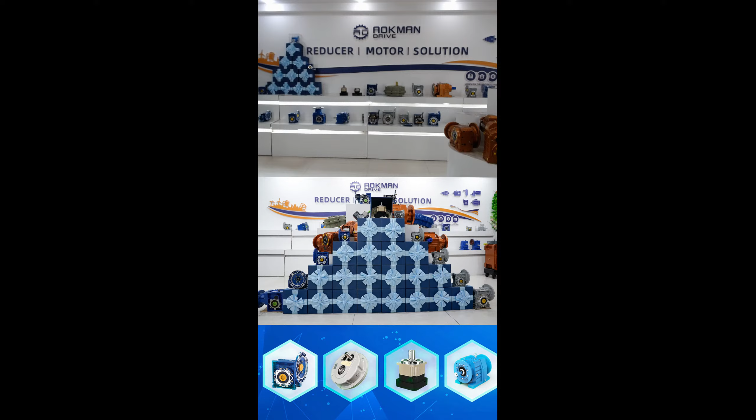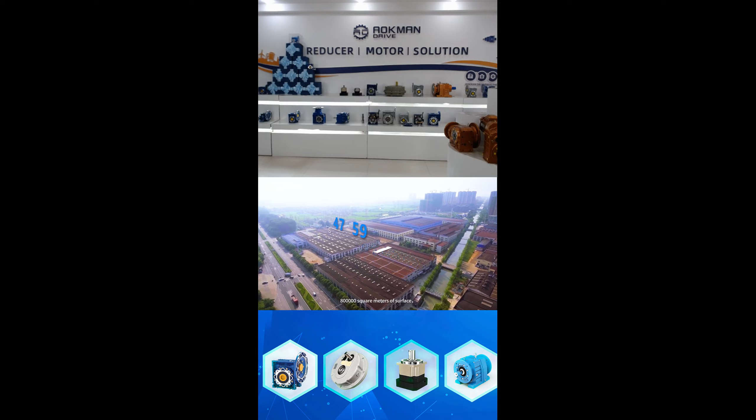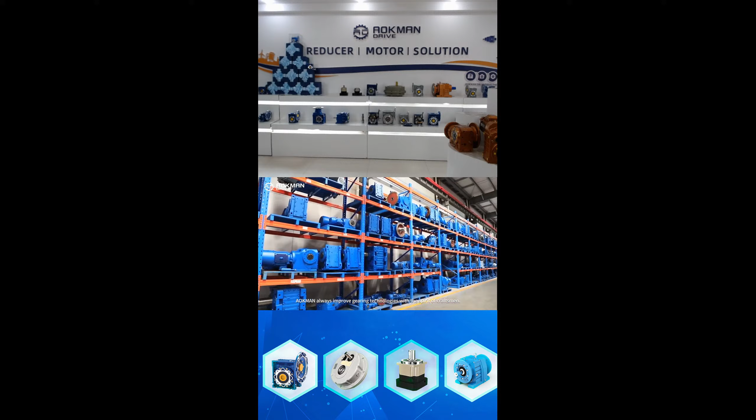Aokman, a leader in the manufacturing of special industrial gear units and standard gear motors. The factory was founded in 1982, with 800,000 square meters of surface, and production made of more than 2,000 experienced workers, with over 30 years of experience in gearbox manufacturing. Aokman always improved gearing technologies with the spirit of craftsmen.

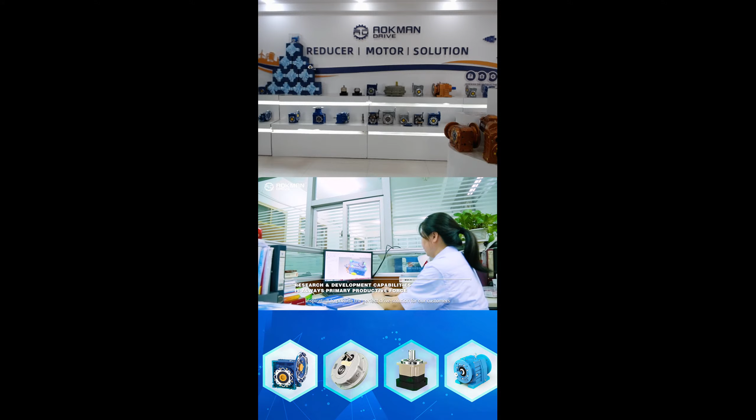R&D concept: inspiration to provide the perfect drive solution for our customers is the foundation behind research and development. Aokman has a professional gear and reducer technology research and development team and has reached the international advanced level in the technology of gear, reducer, and power transmission elements.

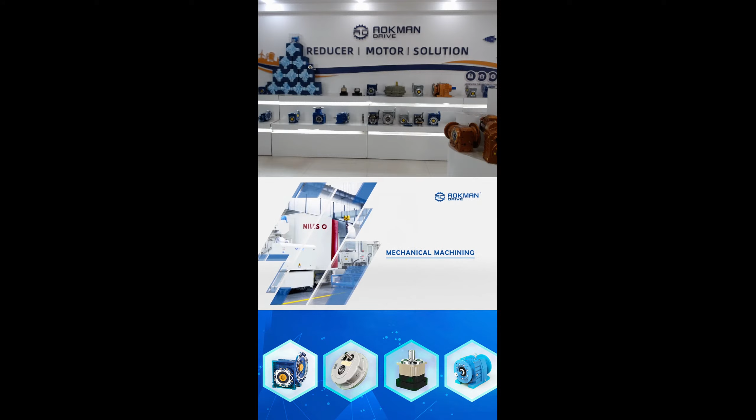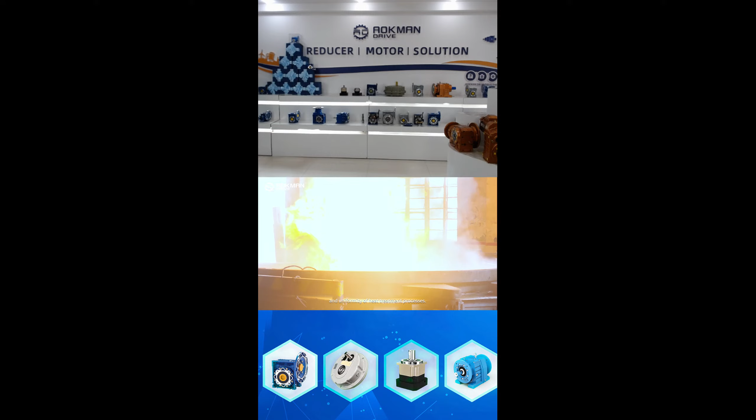Mechanical machining: cutting-edge production technology is the essential building block to achieve high-performance geared products that Aokman's customers are asking for. The high-tech equipment and specialized labor guarantee reliability, quality, and uniformity of heat treatment processes. The industrial complex has been steadily upgraded with leading-edge machinery, which ensures quality according to international norms and standards such as ISO, DIN, and AGMA, with precision in producing gears with quality grade 6, ISO 1328.

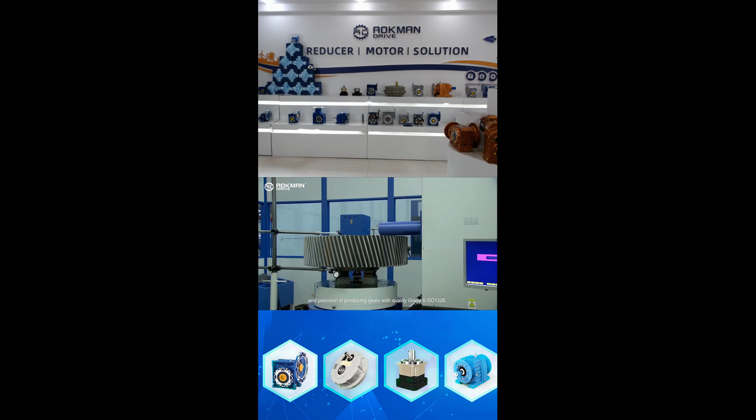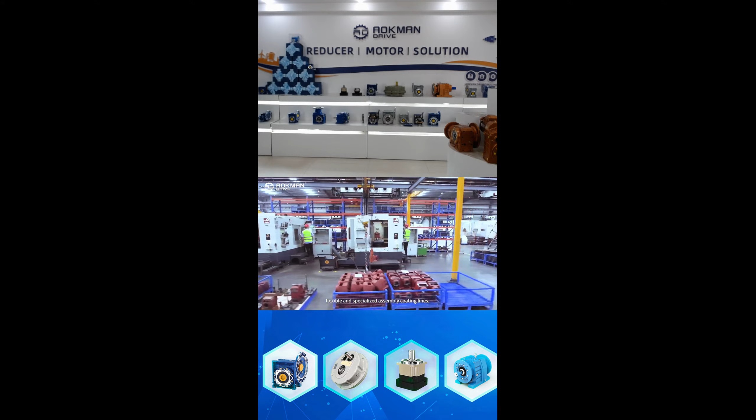Aokman imported equipment from Germany, such as CNC gear teeth grinders and milling cutters. The Niles and Höfler gear controllers allow for ideal precision in gear production. Aokman factory offers the most efficient high-precision production lines, flexible and specialized assembly coating lines, and a digital management system, protecting the environment by using natural resources wisely and seeking benefits for society and the environment.

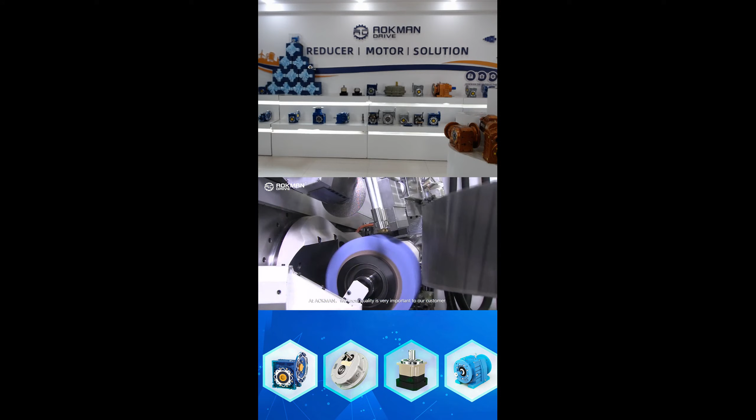Quality control: at Aokman, we know quality is very important to our customers, and we instill that responsibility in every employee. Stringent quality control is carried out at each production stage, from arrival of the raw materials to delivery of the tested, approved products. Any release in quality control is performed using precision measuring tools and modern measuring equipment.

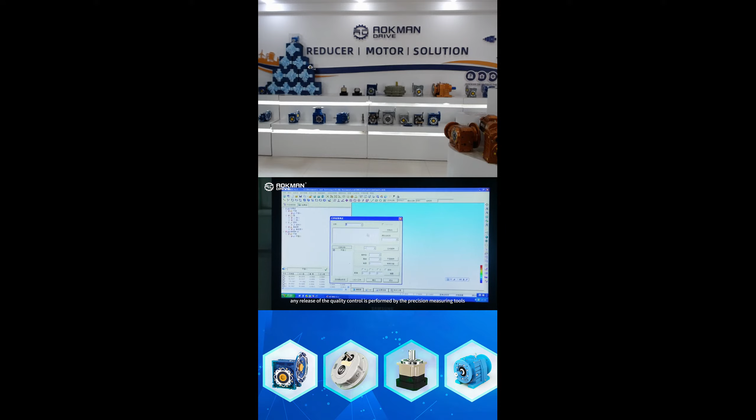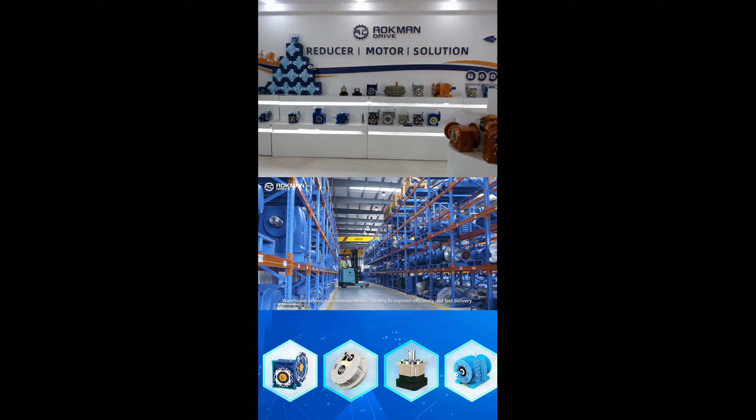Warehouse: information management is the key to improve efficiency and fast delivery. The parts warehouse implemented barcode management, and inventory accuracy reached over 90%. After the implementation of the Aokman Factory Information Platform, production capacity increased by more than 50%.

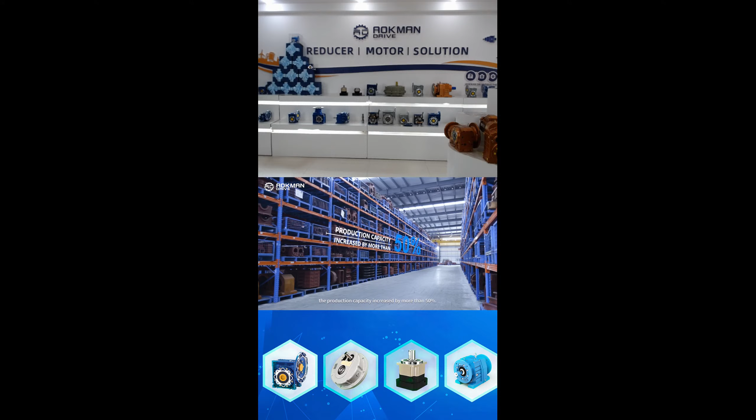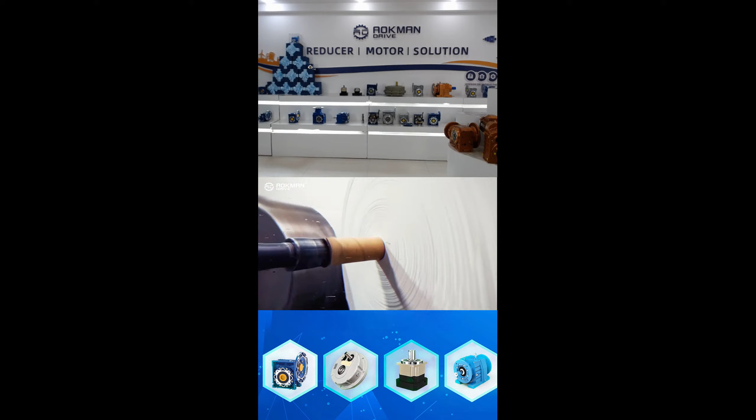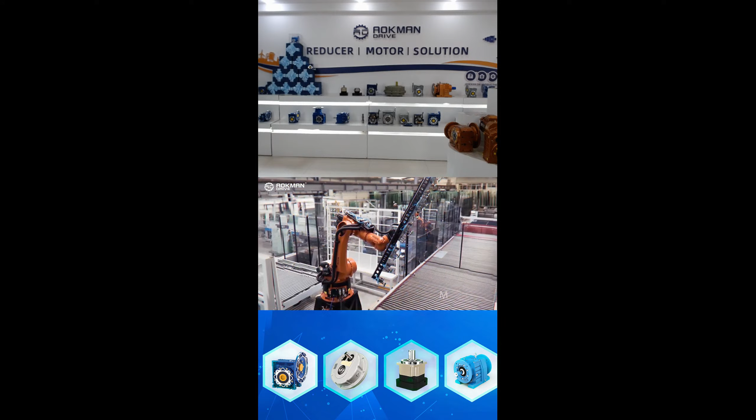Market application: the Aokman product line provides users with a drive solution for different market segments, such as cement drive, sugar mill, mining, pulp and paper, metallurgical, textile, packaging, agriculture, construction, food industry, automation, palm oil, and various other types of machines.

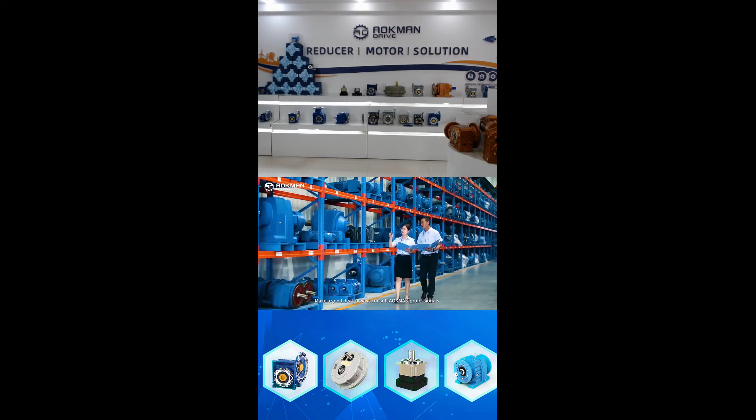Customer service: the product quality of Aokman, allied to the security and efficiency of its management, makes it a brand synonymous with credibility with its suppliers and customers. We are committed to winning a partner rather than being a simple supplier. Want to make a good deal? Always consult Aokman professionals. We assure you of the utmost reliability and security for both products and services.

We are Aokman, the total drive solution provider.

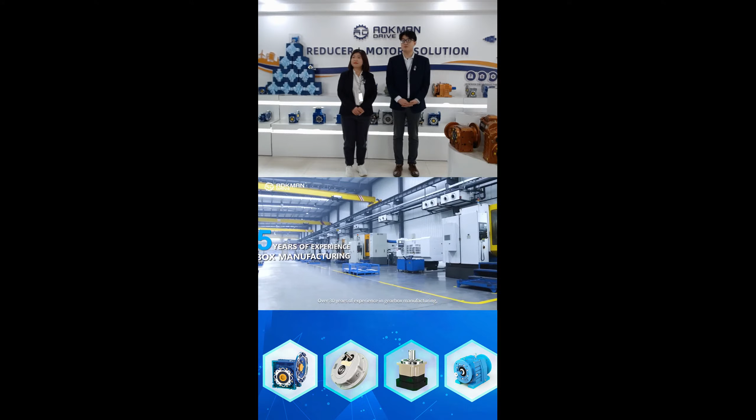Aokman, a leader in the manufacturing of special industrial gear units and standard gear motors. The factory was founded in 1982, with 800,000 square meters of surface, and production made of more than 2,000 experienced workers, with over 30 years of experience in gearbox manufacturing. Aokman always improved gearing technologies with the spirit of craftsmen. Superior research and development design capabilities have become the primary productive force of Aokman's rapid development.

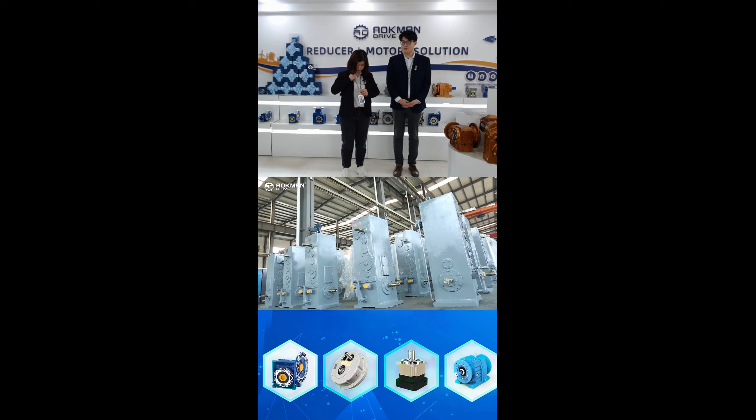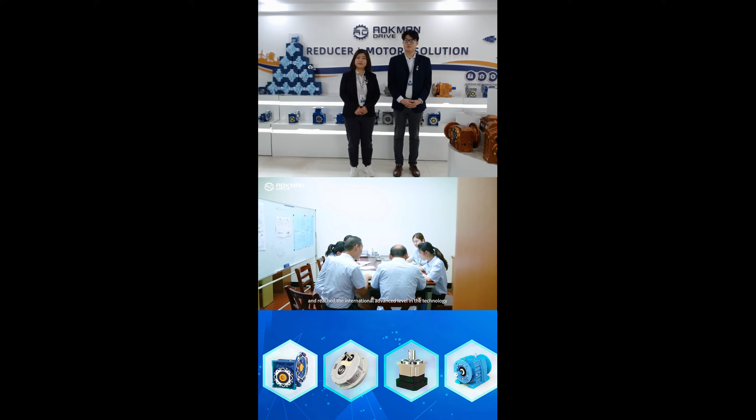R&D concept: inspiration to provide the perfect drive solution for our customers is the foundation behind research and development. Aokman has a professional gear and reducer technology research and development team and has reached the international advanced level in the technology of gear, reducer, and power transmission elements.

Okay, the next one is a new star item, we call it high precision planetary gearboxes. This one is very popular for the automation field, such as CNC machines, printing machines, AGV trucks, and machinery arms, because they provide very professional, very high precision operation with very low backlash, almost 10 or 5 arcmin. This item is very precise, you can use it with servo motors.

So here are the signature and standard items. Some customers or audience may be wondering, if I have a special project or I need to launch a new project, and the gearbox I'm looking for is not among those products, can Aokman satisfy me?

Yeah sure, actually we have two different kinds of lines. One is the standard item, which I think most of our customers' main business focuses on as well. The other line, we have an R&D team of over 300. For the whole Aokman team, we have over 3,000 staff, and only in R&D we have 300 staff. They can design and make sure your concept becomes a real item. We have strong technical support.

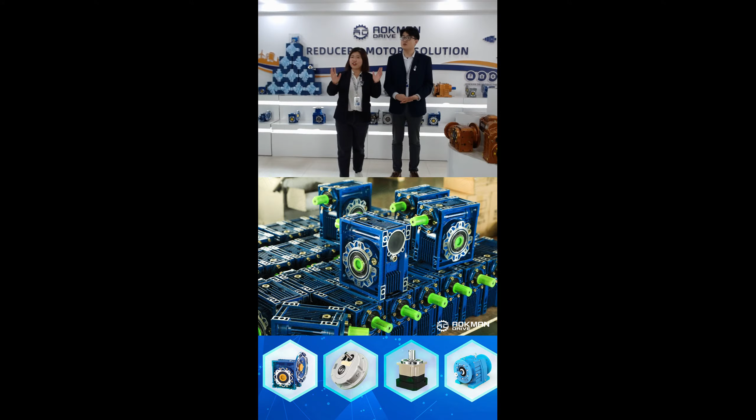We'll attach the images for your review. They're big images. For this item, it seems very small, but actually it's very big. Yeah, it looks small.

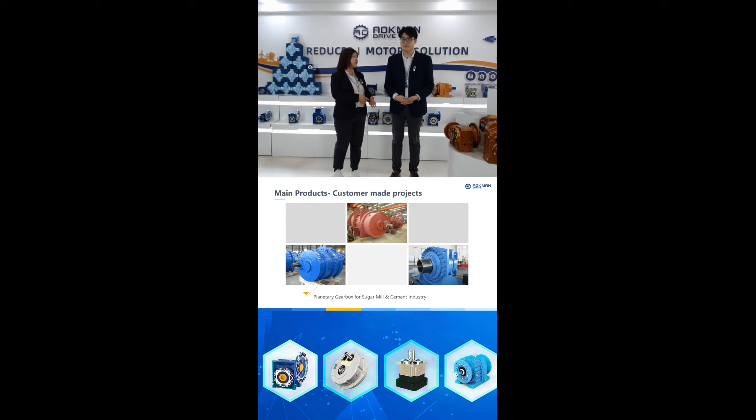Okay, next one, you can see we have planetary boxes, usually used on the sugar mill and the cement ball mill, the rotary. It's a very large item. Oh, this one, the shape looks so weird. Why? Because for custom-made items, we made this item according to customer space, the mounting space limitations, and at the same time, to reduce the cost as much as possible. So this gearbox shape is not similar to the standard item. So we can make the item's outlook according to customer requirement. Okay, that's a good explanation.

So now we finish the product part. We want to show how we could prove we are one of the leading manufacturers of gearboxes in China. Some of the audience may wonder how you could prove that you are one of the best gearbox manufacturers, because we actually invest lots of money on equipment.

Here I'm going to show you some of the equipment we purchased. Okay, let's move to the next picture. You can see equipment from Germany, the grinding machines. Okay, let's move to the next picture.

So this is the equipment I just talked about, from Germany, and the company name is Niles, a very famous brand. This is a grinding machine. It has a grinding wheel inside the machine, and it helps process the gear, especially after the heat treat step, and it will eliminate the deformation, especially after that, and it will actually increase the gear accuracy. Finally, it will increase the gearbox lifetime after purchase from Aokman. Okay, next image.

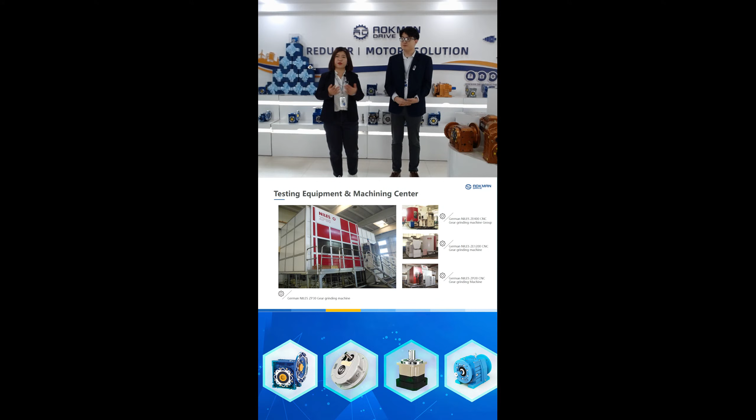So now we already finish the equipment section.

The customer cares about our products, our equipment, and finally, I think most customers want to know about quality control. Yeah, quality is so important for our customers. We want to explain 2 points here because time is very short, but if you want to know more, we invite you to test our sample, test our products. You will see what we said is true.

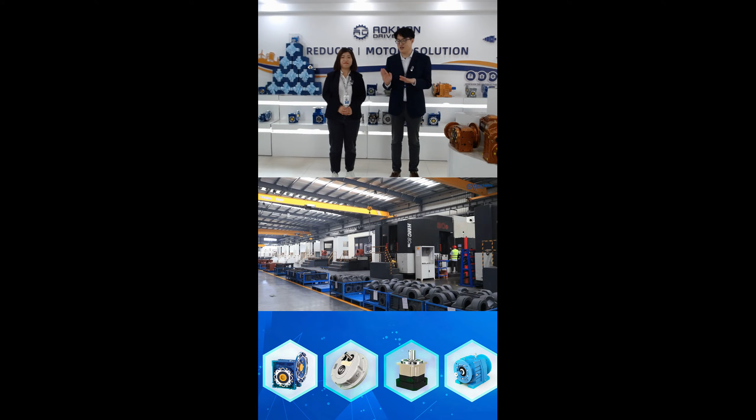Yeah, okay, that's a really good explanation. So the audience will know how the inside of Aokman works, from the idea to the reality.

Okay, next I think I'm going to show you a short video about our warehouse and the delivery.

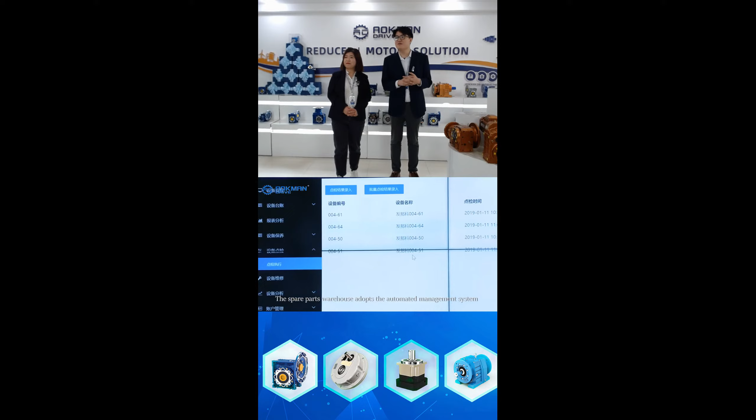Aokman spare parts are available. It not only can shorten the delivery time, but also meet customers' bulk orders. The spare parts warehouse includes bulk part storage, housing part storage, gear storage, and so on. It adopts an automated management system and AGV delivery method to ensure production is finished on time. Aokman QC checks each part before storage to increase the whole production process efficiency and ensure gearbox quality, increasing efficiency by 40%.

Because, as you can see from the video, our warehouse is really big and everything is ready to go. Some customers really care about the lead time and delivery on time, so by having this kind of system we can accelerate the production time and always make sure we deliver on time.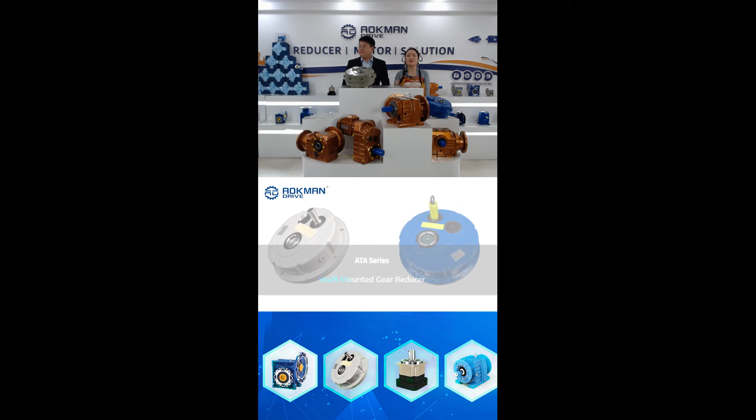This is the shaft-mounted gearbox in our factory, and this is the semi-finished product. This is the finished product. We also warmly welcome you to visit our factory and check the gearbox quality with your own eyes.

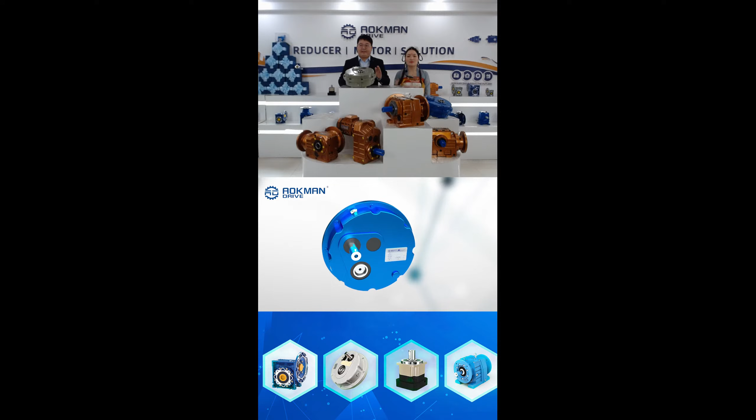As you can see, this is the application shown in the video. Okay, many thanks for watching our video of the ATA gearbox.

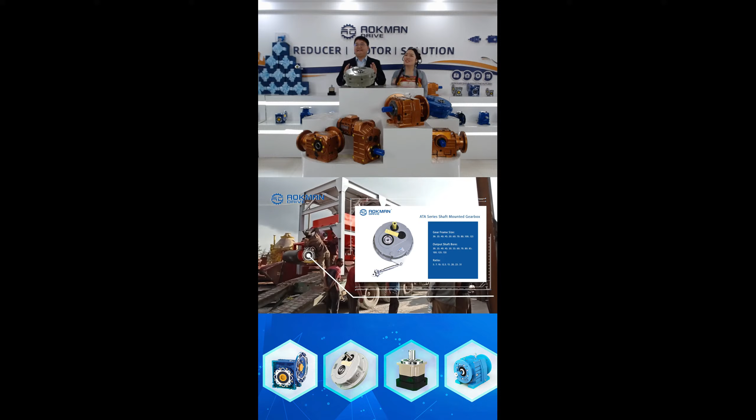Okay, you can see this is the warehouse. And this is the video for the conveyor, and this is the quarry industry.

This is our Aokman gearbox. We use it for our customers' conveyors. So many thanks for watching this video. If you want more details and have any questions, you can tell me, and I will reply as soon as possible. And if you want to test our quality, you can also tell me.

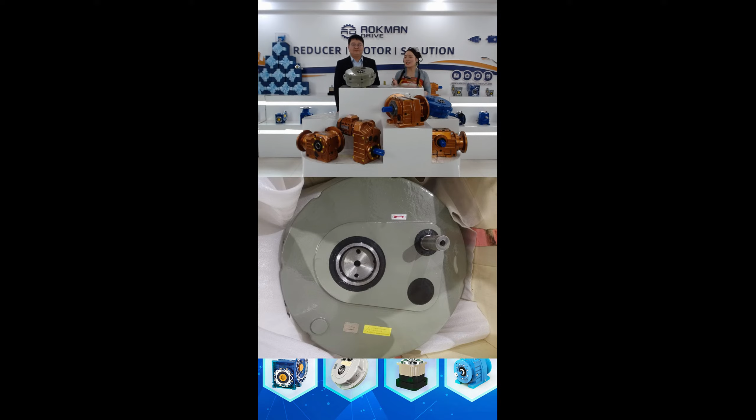And you can see here the ATA shaft-mounted gearbox. You can see the input, we will connect the motor by pulley belt, and the output is a hollow bore. We also have different bore sizes.

Yes, which bore sizes I want to ask about. Which bore size can be used in their market? You mean the bore size in the market? Yes, which one is popular? Okay, I understand, thanks for your question.

Maybe you also have doubts about the bore size. You can see the bore size here, this is a smaller one. Our smallest bore size is 30 millimeters. Yes, 30 is our ATA smaller size, yeah. Smallest bore size is 30 millimeter, and we also have the biggest, for example, 135 millimeter.

Wow, I see, this is the range from 30 to 135. Yes, 30, 40, 45, 50, and so on. The biggest is 135 millimeter. Okay, I get it.

So if you want to get 30, 40, 45, 50, 70, 80, 100, 125, and 135, the Aokman ATA gearbox can offer you any size you need. The bore size can meet all of your needs. And we also see, this side and this side, all are the ATA shaft-mounted gearbox.

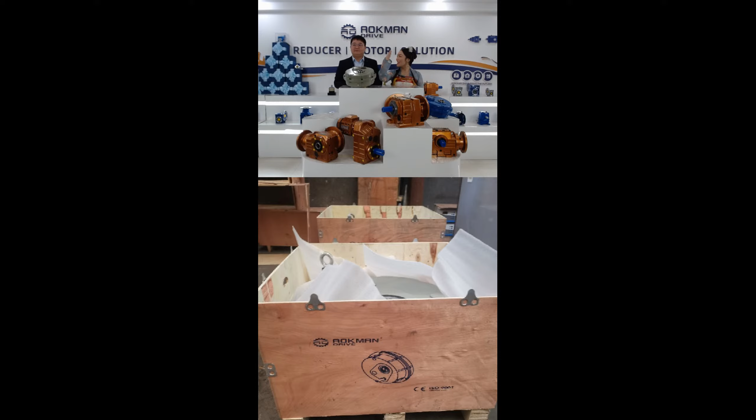Next picture, you can see this one. This is a bigger model, so we pack separately, only one piece in the box.

For big models such as 70, 80, 100, 125, and 135, we can offer this packaging. Just now look also at the side, for example the 135 model will pack like this.

The handle helps the workers transport it easier because we can carry it. This makes it very easy to deliver the ATA gearbox.

You can see this is the finished packaging. After finished packaging, we will ship it to you at once. Next picture is the shipping picture, loaded into one whole container.

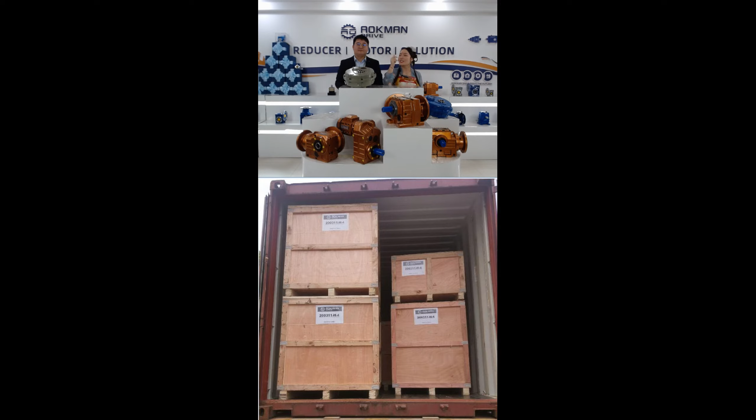Because ATA shaft mounted is very popular in the market, for our clients one container, two containers, three containers is common. For one container, about our ATA gearbox, the quantity is about 200 to 250.

One container is about 200 pieces, but it also depends on the model. If the model is bigger, the quantity will be less; if smaller, the quantity will be more in one container.

Many thanks. Next, I will offer more details and share a video for our package. There will be a video for you, it will be more clear to see the packaging.

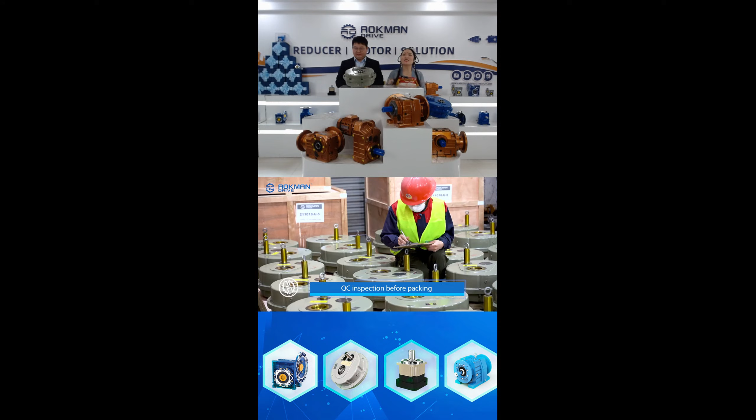This is our green color. You can see this is the finished product in our warehouse. This is the quality checking. After quality checking, we will pack the gearbox.

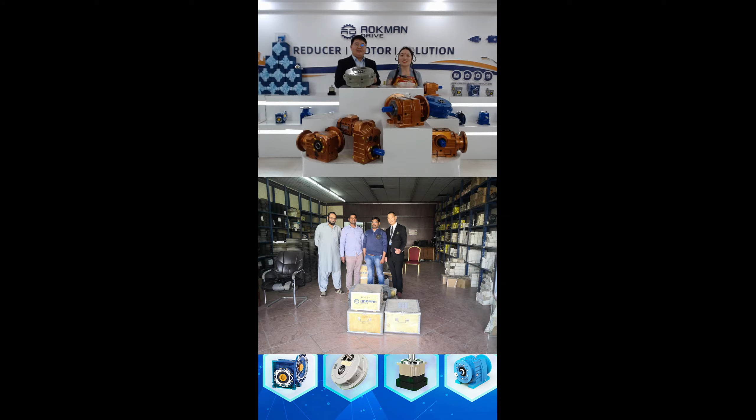Many thanks to Andy for introducing our 88 gearbox package.

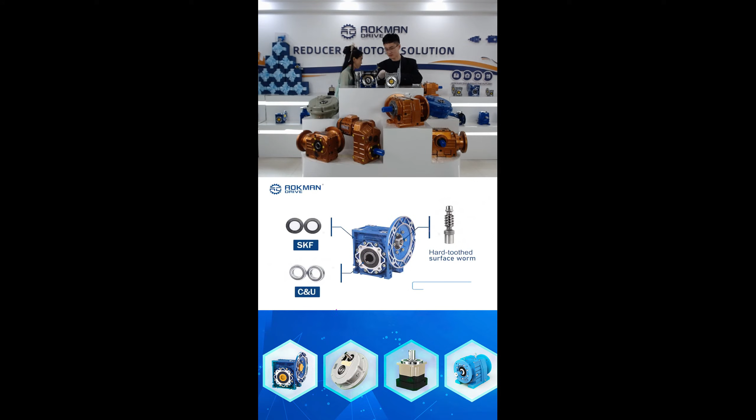Thanks for my colleague Andy and Luke's introduction of our 88 shaft mounted gearbox. Hello everyone, welcome to Aokman live channel. This is Leo. My company Aokman was set up in 1982. We focus on all kinds of gearbox and gear motors. This time I will help you get to know more about Aokman company and also our RV series.

Now let's welcome my colleague Linda. Thank you everyone, welcome to our showroom. Thanks Leo, and yes, we have been founded for 40 years. As I know, the RV series is one of our most popular products. Some of our customers report that our RV series are the same as other manufacturers in the market, and Aokman sales continue to increase and become more popular.

Actually, most of Aokman's RV orders are from existing customers. After they have a trial order, they find the Aokman RV gearbox has higher performance and is lighter, so when they compare with others, they find they save on purchasing cost. Aokman always cares about the quality.

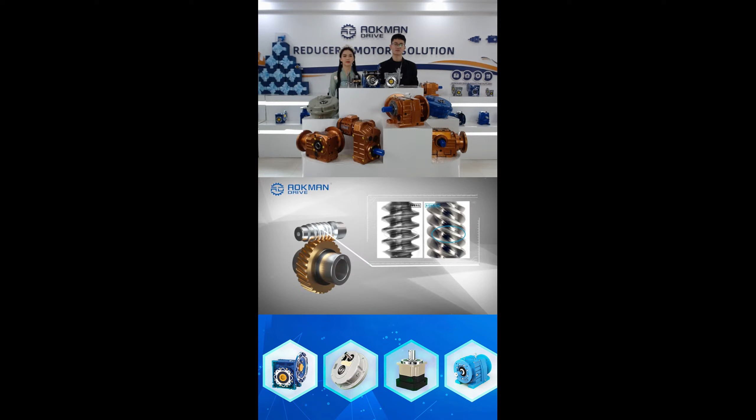Okay, thank you, Linda, for introducing the workshop of our RV series, and also thanks for the videos.

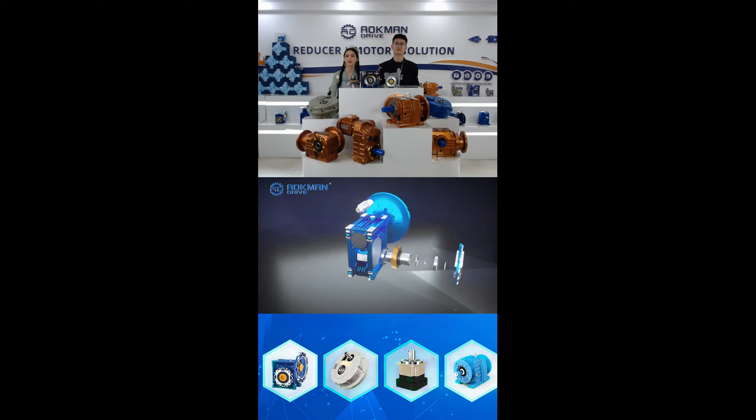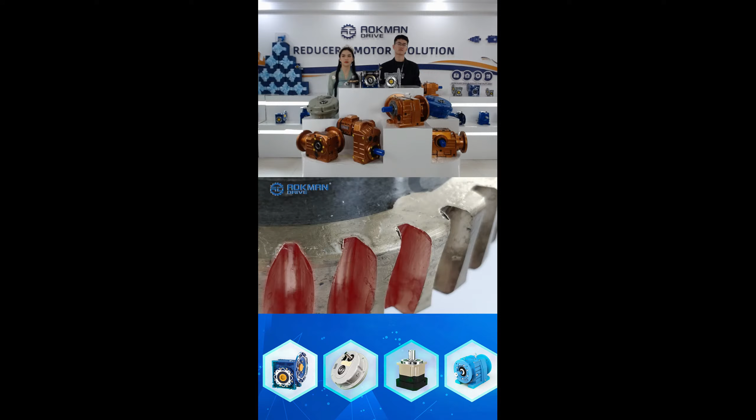Why is Aokman RV better? Aokman worm gear has an involute profile, which has high transmission efficiency and has been chamfered. The noise during work is low, and the transmission accuracy is greatly improved. In contrast, other brands' tooth profile is not optimized, transmission efficiency is relatively low, and there is no chamfering processing. The worm wheel is noisy during work. Furthermore, the worm gear and worm shaft easily collide, which seriously affects transmission accuracy.

Aokman worm gear is made with precision machining, which makes the worm gear more wear resistant, with longer service life and higher transmission accuracy. Other brands use rough processing, which accelerates wear on the worm gear and severely shortens its life.

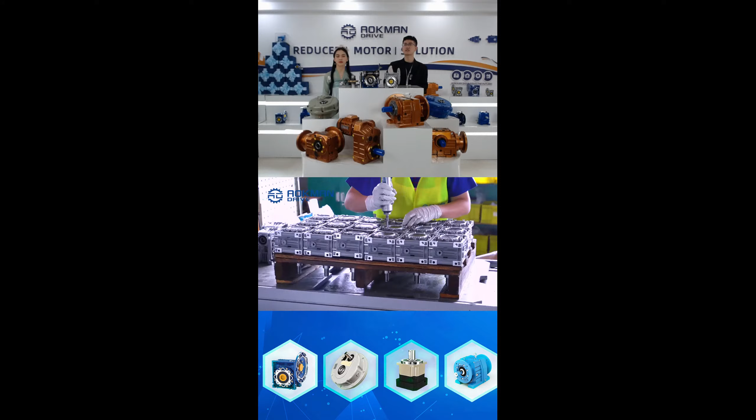Every Aokman product will be tested before delivery. This ensures our quality.

Thanks Leo for introducing the Aokman assembly process, so maybe you will be more familiar with Aokman.

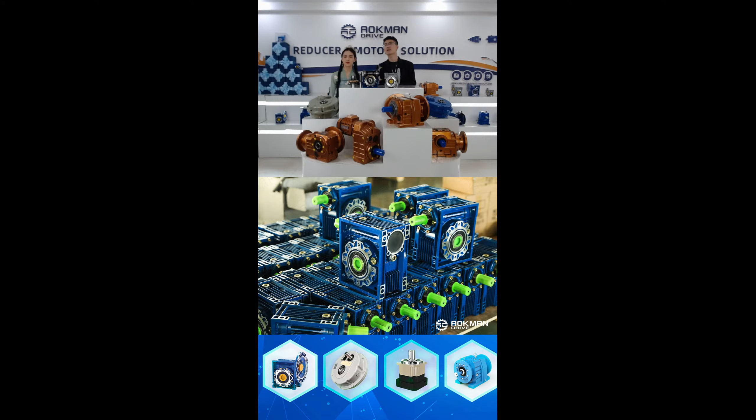Next I will show you some of our finished products. Let's see some pictures. You can see this is our blue color series, customized with a solid shaft. I like this color. Okay, next one.

This is also the blue color - you like it, it's your favorite color. This is the standard NMRV with the input line and the hollow bore.

Next one, this is the big model of our series. As we know, from RV30 to RV90 we use aluminum housing, and bigger than 110 we use cast iron housing.

Next one, you can see this is our special package for VIP customers. The package is very useful and reliable to ensure no issues during delivery.

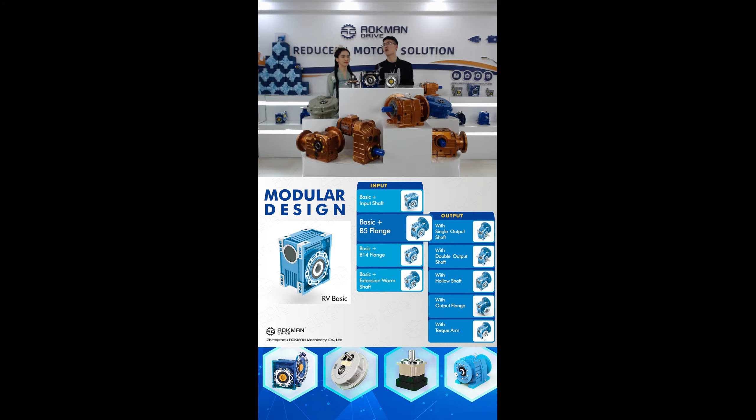In this slide I will show some different types of Aokman RV series. For the input, we have the B5 flange, the B14 flange, the solid shaft, and also the square flange. For the output, we also have many different types, like the hollow bore, the solid shaft, the longer flange, the shorter flange, and many other kinds of types.

No matter what requirements you have, Aokman will meet you, because we really have a very professional engineer team. Thanks Leo for introducing many kinds of Aokman RV gearbox types. You can see this is a type for the output flange. It's the FA out flange, and it also comes with the solid shaft. Also, you can choose the hollow shaft. We can make it as your customer requires.

This is the square flange, it connects with the DC motor. And Leo, if we want to make the ratio bigger, how can we reach it? We call that BRV, using two RV gearboxes to make the ratio bigger. If you want to reach a big ratio, you can connect two aluminum gearboxes together by tapping, so you can get the big ratio.

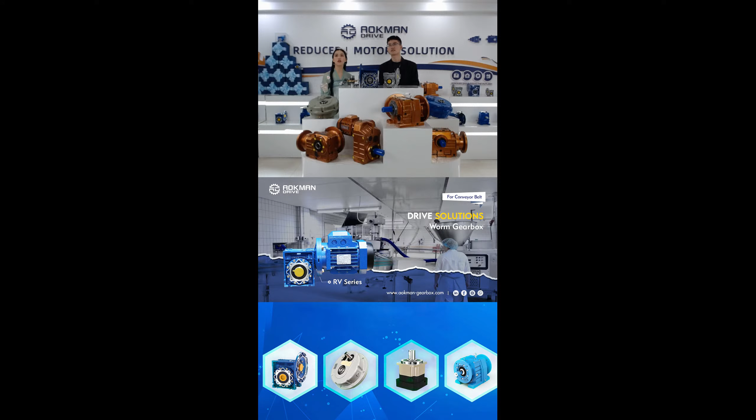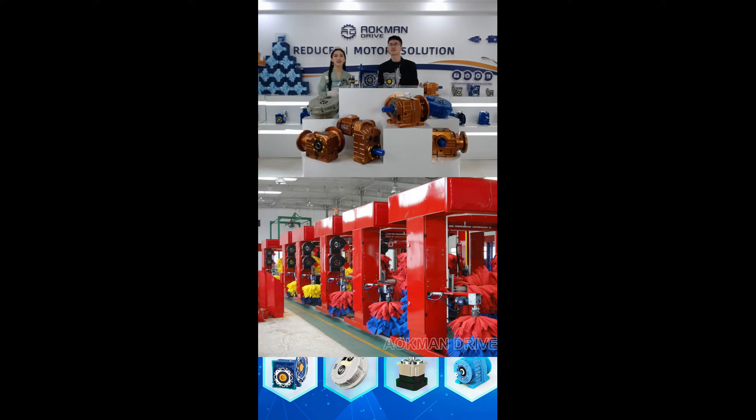Leo, I want you to kindly explain this RV gearbox. Yeah, of course, I know this. This is for the car washing machine. Yeah, I love cars, so I know a lot about that.

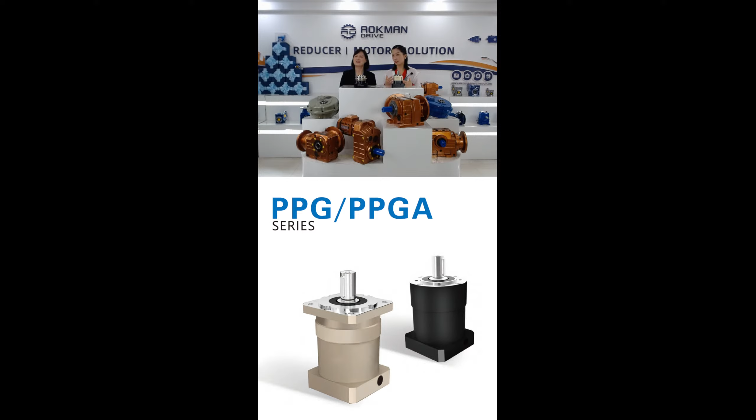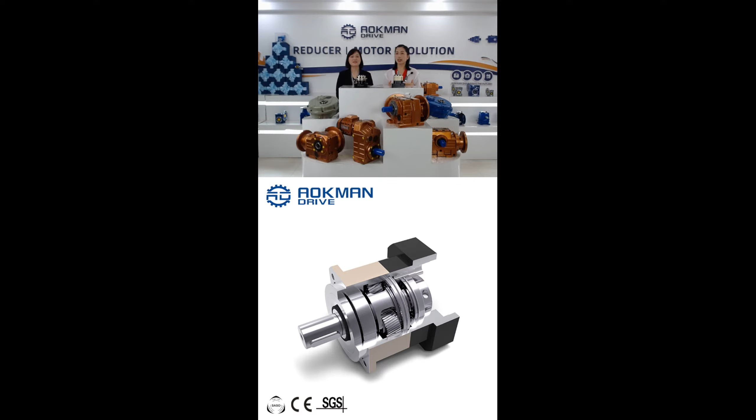Later, I will introduce the structure features. Yes, thank you. So show me the pictures. Includes PAB, PABR, PPD, PPG. Yes, frankly speaking, I like all of them.

But I want to know some more detailed technical data. Could you tell me something from the ratio? When we talk about the ratio of this type of gearbox, we must separate one-stage gearbox and two-stage gearbox. For the one-stage gearbox, the ratio range is from 3 to 10, and for the two-stage gearbox, the ratio range is from 12 to 100. You can see the ratio range is very wide. Yeah, exactly. It has a wide ratio range.

For the high precision gearbox, it also has a special feature, that is backlash. So could you tell me something about the backlash? For the one-stage gearbox, the backlash is less than 3, and for the two-stage gearbox, the backlash is less than 10. You can see the backlash is very small, and different backlash gearboxes will be used in different industries. So if you want to choose the suitable backlash, please let us know your exact application and exact equipment. Thank you, Emily, for such a professional and friendly introduction about the backlash.

You know that customers may pay attention to efficiency because they want to save energy. So can you tell me something about the gearbox efficiency? For the one-stage gearbox, efficiency is up to 97%. And for the two-stage gearbox, the efficiency is up to 94%. It's very high precision.

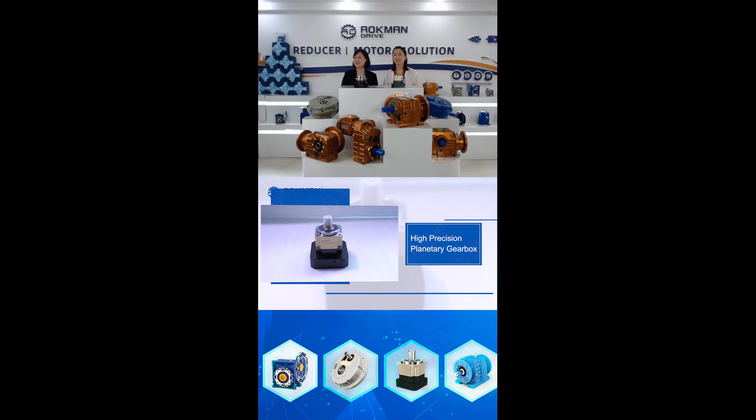Okay, this is our finished gearbox - very beautiful colors. This is the inline type; most customers like the inline type.

This is the application video from our customer.

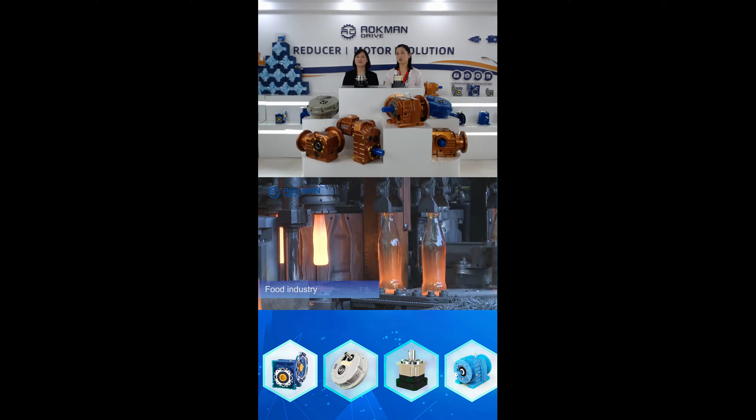Okay, another video. You can see the package - outside is the pattern. This is another application video.

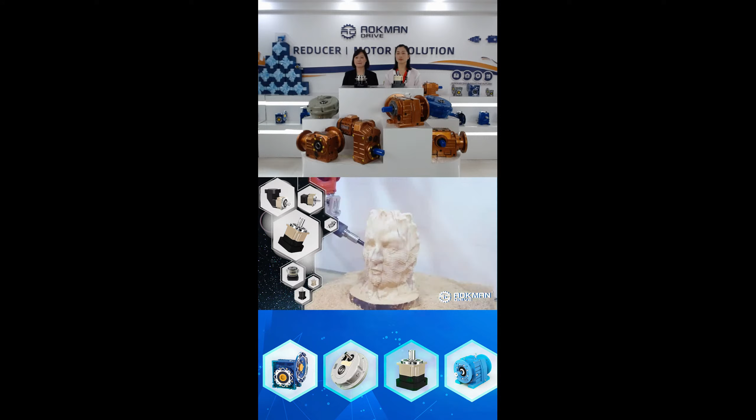Thank you for your friendly introduction about the videos. And the next question is, some customers may be worried about our warranty. So could you tell me more about that?

Yes, for the warranty, many customers know that according to the international standard, it's only 1 year. But we trust our quality, so we can give you 1.5 years. And lifetime maintenance is always free. We are always online and standby for you, so you can contact us anytime. Don't worry about the time difference.

Dear friends and dear customers, did you hear it clearly? For international standard, it's only 1 year, but for Aokman it's 1.5 years. So you can always trust Aokman.

Customers will pay more attention to our inspection because it's an important factor in the whole process. So could you tell me more information about our inspection? Okay, for the inspection, all the technical processes must be controlled, such as the gears, hobbing, shaving gears, honing and grinding. All the process must be controlled, and all the spare parts and procedures will be tested.

For the spare parts, before we use them, we must test the spare parts one by one. After finishing the gearbox, we also test the gearbox running, one by one. Any unqualified gearbox is not allowed to be delivered from our factory. We must ensure the quality of the gearbox for you.

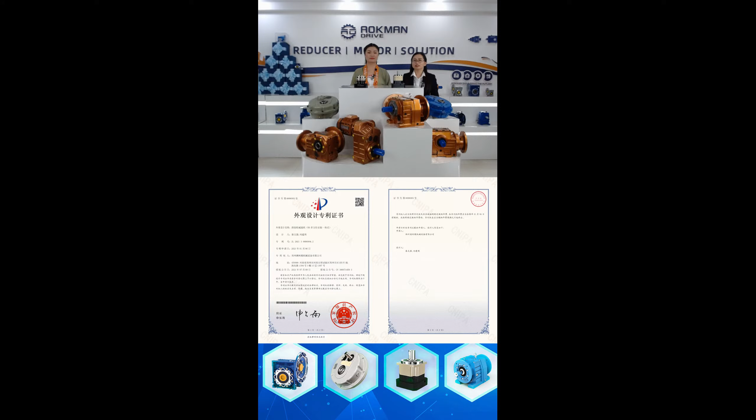This is also our R-series inline helical gearbox with the output flange.

This is our S-series gearbox with the motor. This is our K-series helical bevel gearbox.

This is the S-series with the output flange, solid output shaft. This is our blue color, and our blue color is different from the market, as you can see from the pictures we showed just now. We can also make other colors like gray, or customize colors as the customer requests.

Which color do you like? I think I like blue color. How about you? I prefer both colors because I think each one has its own advantage.

Let's continue our question. Tell us about the mounting position for the R-series gearbox. For this R-series, the mounting positions you can see like this sample: foot mounted and flange mounted, two options.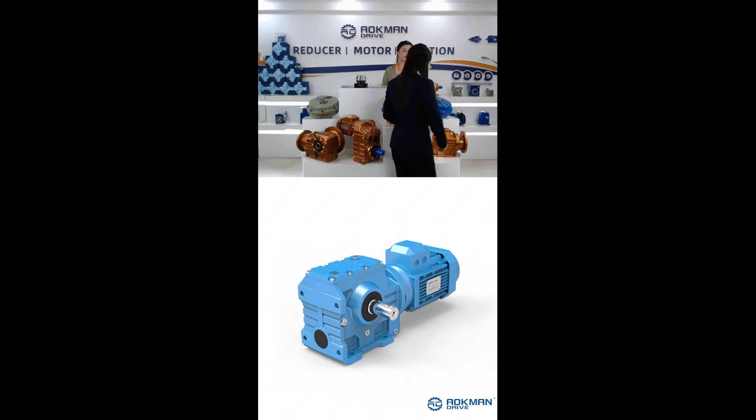How about the mounting position for the K-series gearbox? For this K-series, it can be foot mounted like this sample, and also flange mounted and shaft mounted. The F-series and X-series are the same as this K-series. So we need to confirm with the customer before production which position they need.

You are right. Okay, that's great.

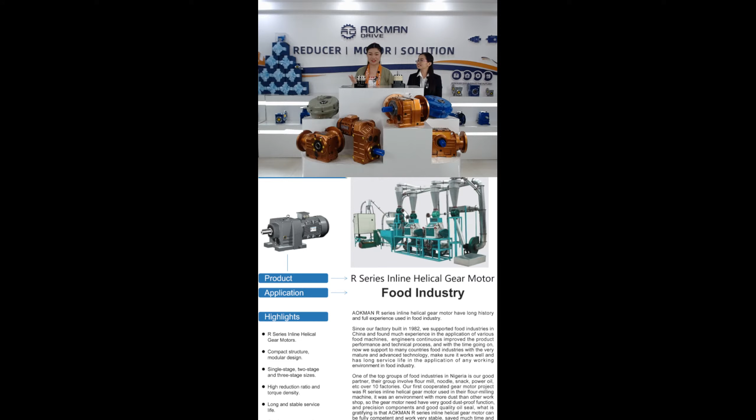In the following time, we will show you more detailed pictures of the application so you can better understand the range of applications for the Aokman gearbox. From this picture you can see our R-series inline gearbox used for the sugar mill. And this is also an inline gearbox used for a packaging machine.

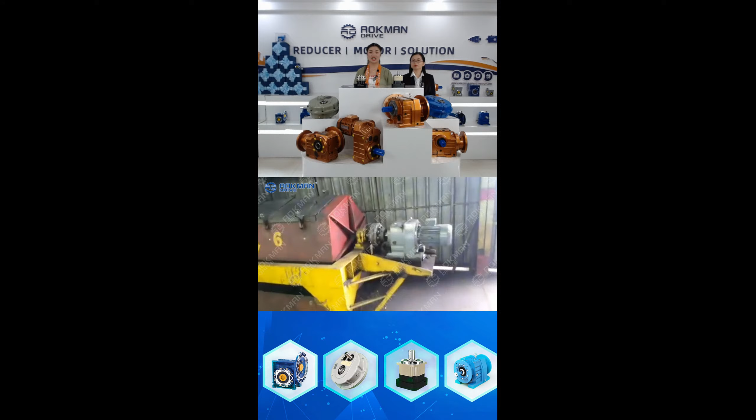This is our K series helical gearbox used for a conveyor. And this is also the K series helical gearbox used for a crane. And this one is also the K series helical gearbox used for a food machine - this is another industry-needed machine.

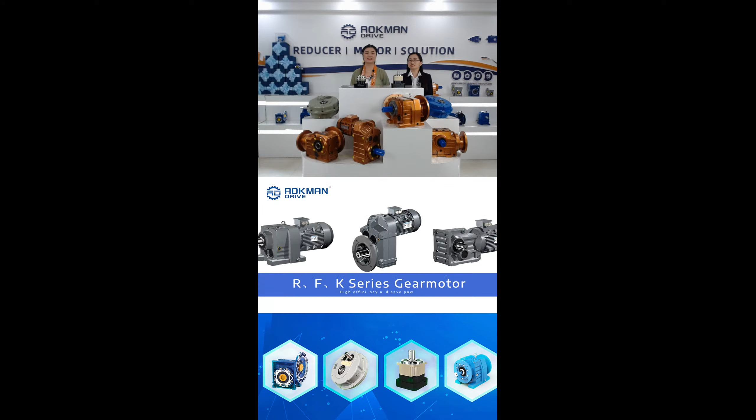We have also prepared a detailed video so you can better understand the 3 series of Aokman gearboxes. This is the R, F, and K series. This is the R series finished products, F series finished products, K series finished products, with different mounting positions and different output options.

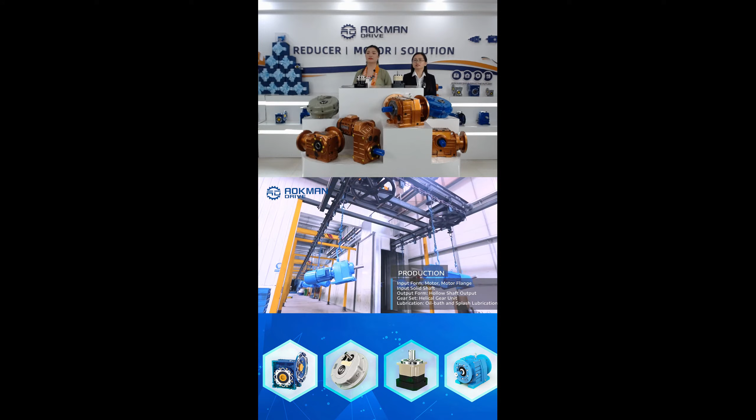Test, inspection - this is the housing line, this is the production line. You can see this is the blue color; as I mentioned just now, we can make different colors. And these are the applications for different industries.

Packaging. From our videos and application pictures, you will know our products can apply to different industries.

From all the details we introduced, I believe you know that we don't do one-time business with our customers. We are committed to winning a partner rather than being a simple supplier. Make a great deal - always consult Aokman professionals. We assure you the utmost reliability and security, both on products and services. We are Aokman, your total drive solution provider.

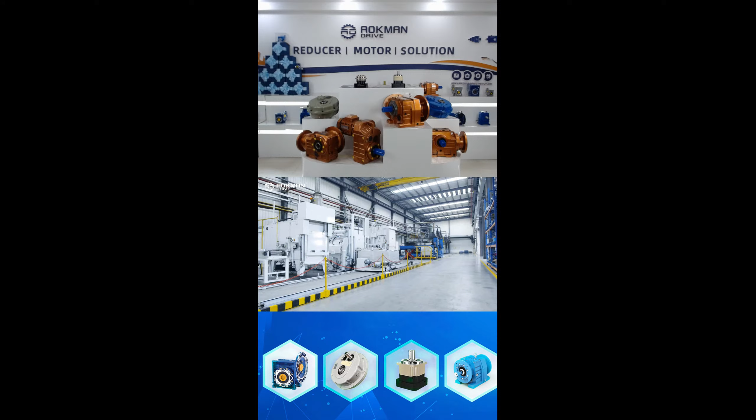Aokman, a leader in the manufacturing of special industrial gear units and standard gear motors. The factory was founded in 1982, with 800,000 square meters of surface area. Production is made by more than 2,000 experienced workers, with over 30 years of experience in gearbox manufacturing. Aokman always improves gearing technologies with the spirit of craftsmen. Superior research and development design capabilities have become the primary productive force of Aokman's rapid development. R&D concept: inspiration to provide the perfect drive solution.